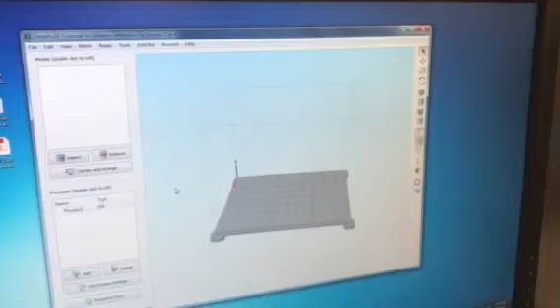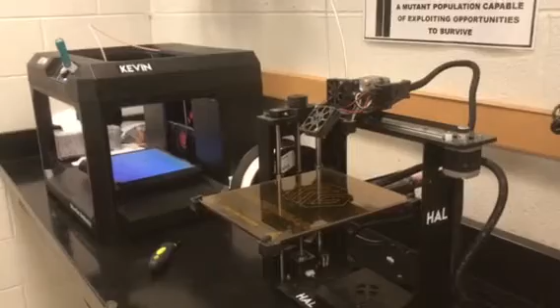We are going to print on our MakerGear printer, which we have named HAL. We also have a MakerBot printer next to it. Our MakerGear is one of our favorite printers to use.

The first thing we have is our USB plugged into our computer, which we are then going to access our file. We'll go up to File, or simply go to the Import icon, click Import. We're going to import the file Jack's Spinner, and that file is going to drop in.

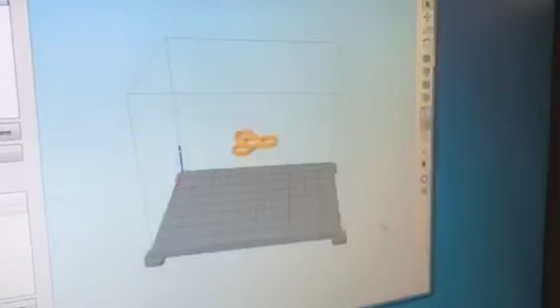Now sometimes they don't drop in nice and easy like this one did. You may have to go up to the movement icons, and you can move around your screen and see exactly how the piece is going to be laying down on the platform, and how it lays on the platform is important.

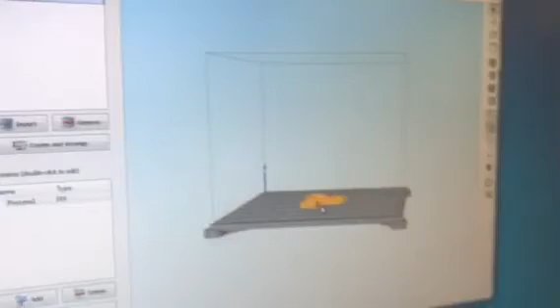If we go up to Edit and scroll down to Place Surface on Bed, you can sometimes click other surfaces to get those surfaces to lay flat on the bed.

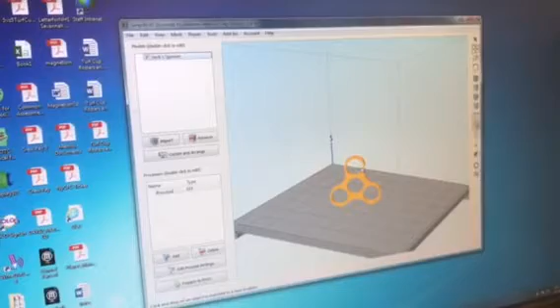However, with most objects, you always want to try to find a flat surface so that they could build layers evenly, versus leaving yourself with sides and angles that don't necessarily have supports when they print, or you end up with something that looks like this and it becomes very difficult to print the bottom of things.

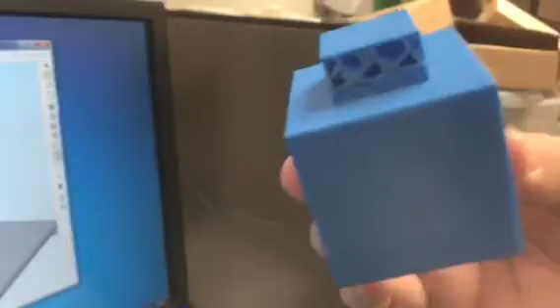So with that said, we like to go up to Edit, place a surface on the bed, and we're going to click one of our flat surfaces, and then we can center and arrange.

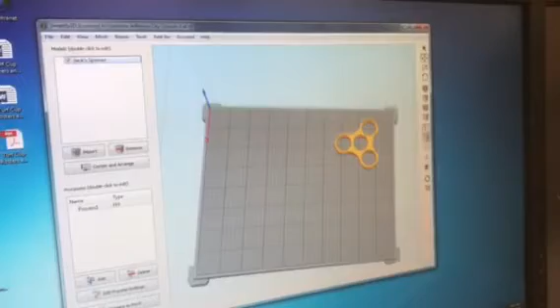Now if I had other objects in here, I would use the Move feature, and I would actually move the object where I'd like to, and then we could import more of them if we wanted to mass produce the Jack's Spinner file.

Now with that, we have the great ability to do multiple prints, and it really makes for easy 3D printing.

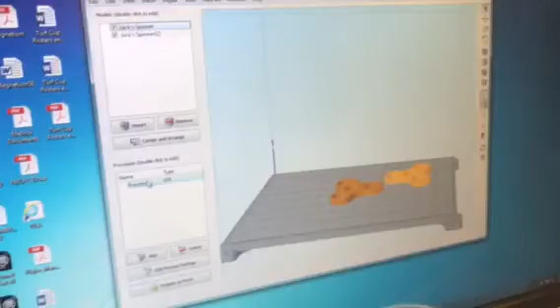Now once we get to this point and we have our object selected and we placed it on the bed appropriately, we are going to go down and prepare to print.

When you prepare to print, you have two options: to begin printing over the USB, or save tool paths to disk. We don't save to the disks, we just begin printing over our USB.

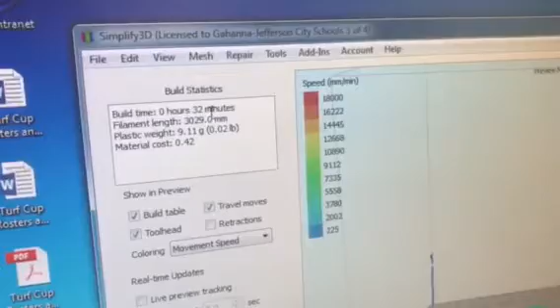What's really cool is it does give you build statistics up here, and it tells you how long it's going to take to print, 32 minutes, and if you were charging or wanted to know how much material cost was going to be involved, it gives you an idea of what those specifications would be.

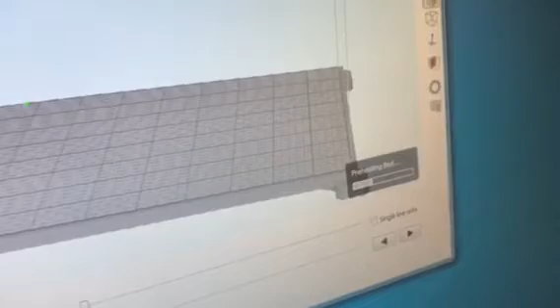So we go to begin printing over the USB, we click it, and as you can see here, the bed of the MakerGear is going to start heating up. This is a nice 3D printer because the platform also is heated.

I believe it gives us a better quality print over other printers that have a non-heated or temperature controlled bed.

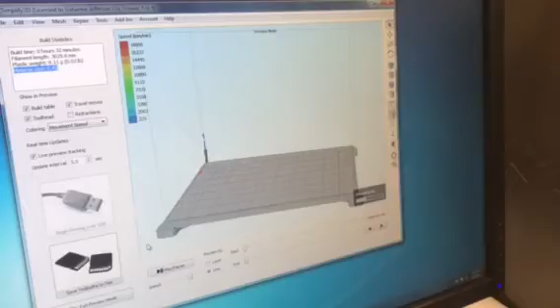So as this is heating up to 215 degrees, we can actually go to settings here, and you could see that the extruder and the heating of the bed is taking place.

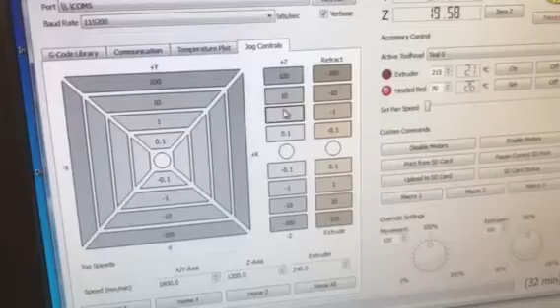In these settings here that you have, your emergency stop in case something doesn't go well with your print. You can actively jog the controllers if you wanted to look at your X, Y, or Z planes if something wasn't working correctly. This is more for troubleshooting purposes.

If you just go on to Simplify3D and use their platform, it's pretty simple to use, and we don't really have too much problems with this.

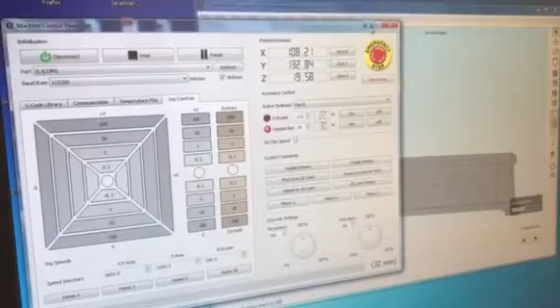So once this becomes heated up, we can close out of the window. Once this heats up, we can exit the preview mode.

And then your STL files will soon start to print, and we will make another video showing you the conclusion of those.